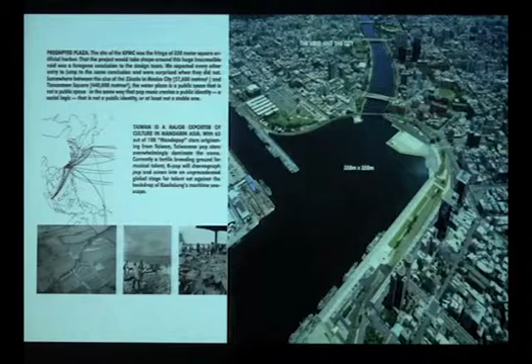Obviously, the first question that might come to mind is, if we are thinking of this big square that is the largest open space right adjacent to the center of Kaohsiung, as a public space, what kind of public does it bring into existence? Another way to ask that same question is: is pop music the occasion for a public gesture?

Which I think is actually a pretty interesting question. We might wish for something that is more stable than pop music, than a commercial phenomenon, something that's formulaic, but also something that is huge. This is called Mandarin pop, larger than pop music is in the West by a good degree, and a lot of the rising stars are Taiwanese for some particular reason, leading it to be a point of pride.

It seemed that somehow if we couldn't leverage a full-scale social space, public space, on the back of pop music, perhaps the instability or the frivolity of pop music—maybe we could do it if it were qualified by the fact that the space is actually a void, that the space in fact is unstable as the occasion that brings it into existence. And we could work with that. We could go forward with that.

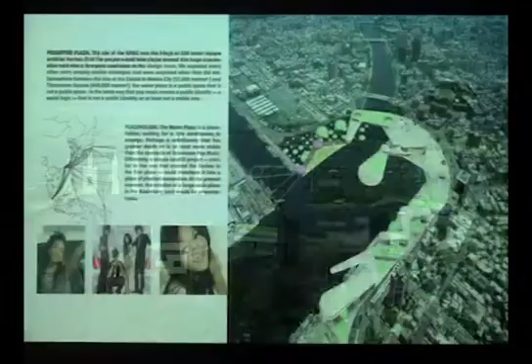This was our first study model cut into the site, showing that we essentially occupied the fringes. Also thought of it as iconography.

There's a huge rivalry between Kaohsiung and Taipei. And this is actually from the competition brief that compared the size of Taipei 101, which is a very large building—the second one, actually this one up here in the scale—to the size of the site, adjacent to a very large building in its own right, from which this picture was taken, which marks the landscape now, the jumbo-sized landscape of New Kaohsiung.

And this was very much thought to be a part of this big world. Therefore, we took on the entire site, as opposed to taking on just one or just two sides of it.

The way we took it on really comes from the fact that 20,000 people at one time might come and go in a single afternoon. Something that a single building has somewhat difficulty doing, but a city can do quite easily. Cities can manage large numbers of people in short periods of time, such that it was obvious from the beginning that we would take an aggregate, make an aggregate solution.

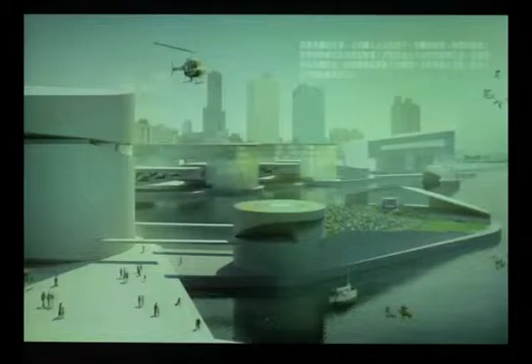And I think it's fairly self-explanatory, the way that we manipulated the basic circular unit and then connected it and interlinked it with a fairly complex program, the program you can see on the right being spelled out.

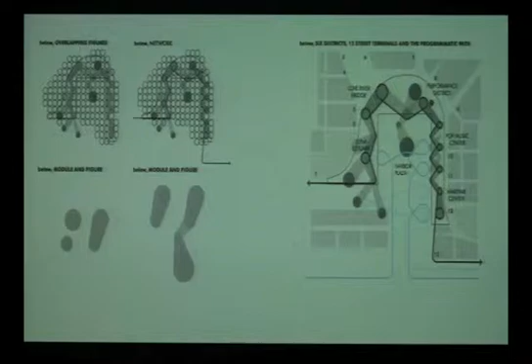It's a very simple strategy of setting out a field, providing the means for figuration, and then coming up with an access, a way to penetrate that field to open up these main programs to the city surrounding it.

We wanted a geometry that was very, very rigorous and self-referencing, but at the same time was utterly connected to the world outside of it.

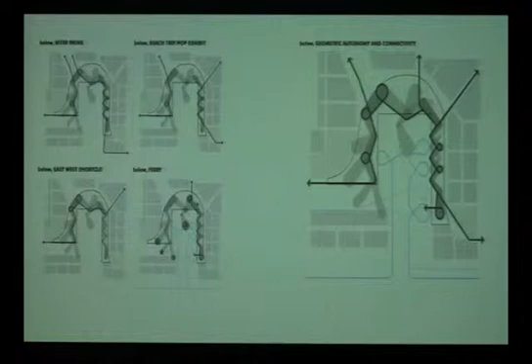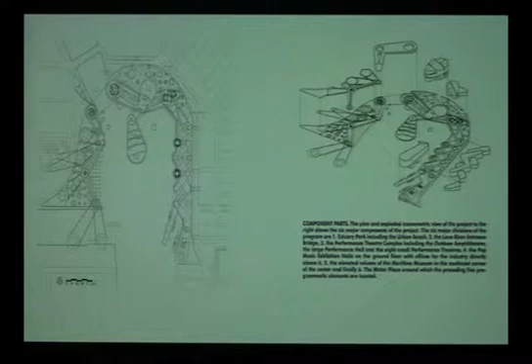This just goes through the pieces of the program, which, despite the fact that the underpinning geometry is pretty demanding and restrictive, ultimately gave us a lot of room to develop different characters around the site, but still hold it together, primarily by the large figure in the center.

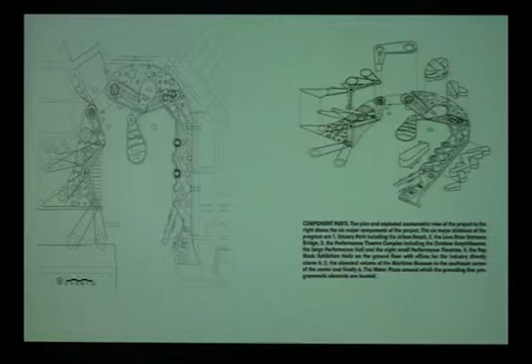One side of it, we reconstructed the estuary, did a lot of environmental research which I'm not showing, but it was backed up by a public space, a beach, for lack of a better word, that faced the open amphitheater. The program toward the back of the screen is the pop music exhibition space at the Maritime Museum.

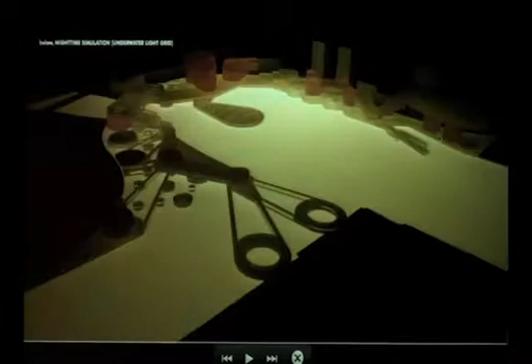These are the two theaters, which I think I have some images of. We did take on this void. This is a really crude way to explain in the competition that we had put a field of lights. There's a tradition in Kaohsiung of lighting the Riverwalk, which we extended to this big open space.

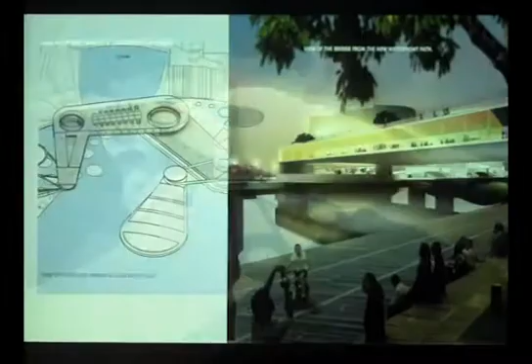There's the performance theater, about 3,500 people, and then the 12,000 seat amphitheater with a single choke point, which, believe it or not, was a requirement in the program.

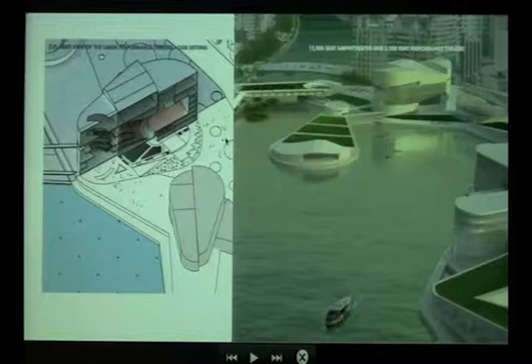This is the Love River that comes out of the city. This is obviously the estuary condition that was reconverted. The bridge over the Love River, which I just showed.

This is around the back of the large performance theaters, one of these dead-end conditions that picks up a plaza and creates the entrance for two performance theaters with the wet plaza in the background. Estuary.

There's the diva again as the culmination, but also the question about the social. And as an example,

What we were doing in this project, thinking about how to make the bridge between architecture and urbanism, is to be particularly sensitive to the effects of infrastructure.

The power of infrastructure, not just in this building but in this project, and in any project, is that it reaches deeply into buildings, that buildings are completely conditioned by infrastructure in a way that we really don't acknowledge when we're preoccupied with buildings, I think.

We've all thought of the example of taking a spec office building and putting it in a central business district in a downtown area, then taking that same architecture, that same building, and putting it in an office park on the edge of town. We know instinctively, because we're sensitive to environments, that those are completely different environments because of the different urban conditions they sit in. The difference for us, for me, is in the infrastructure.

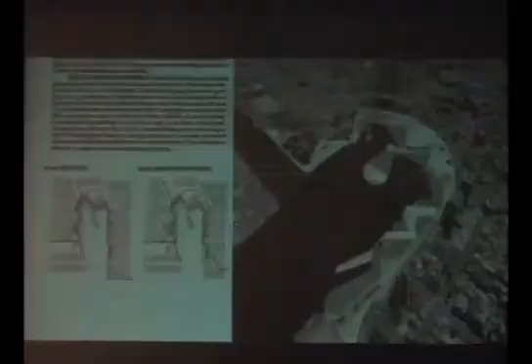It determines if you walk fast or walk slow, left or right, up or down. It determines actually if you walk at all. Up until the moment it breaks down, infrastructure operates in the background, leaving us largely unaware of the complex network of subjects and objects that surround and define us. The fact that infrastructure is unseen makes it more important, not less.

It's a kind of sensitivity I've always carried with me, and it seemed to me for a long time to be the key, however it can be addressed, between the architectural and the urban. It is the atmosphere that this building sitting on a campus contains, because it sits on a campus as opposed to a city street. That's architecture. That's something we can work with.

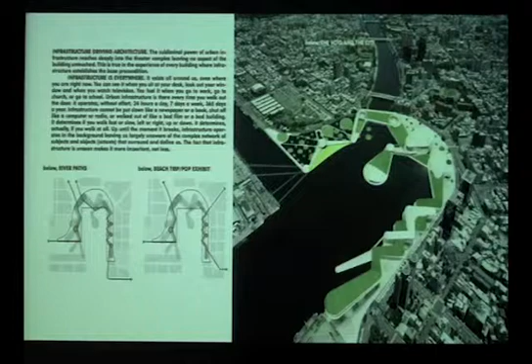That raises a second question. This voided out diagram is not a very good introduction to it, but it's the best I could actually do. It's not the way the void is usually represented. The void, as I said before, is the water.

But it raises the question of what infrastructure. Number one, what would this building be if the infrastructure weren't around it? It would not be a very interesting building. But more important is the fact that the infrastructure that surrounds this building is outmoded.

It's going to take me a few passes at this to get it across. This infrastructure is gridiron infrastructure, like the infrastructure of LA County. It is a continuous open gridiron grid structure which in its formation is ancient. What we also know, because we can look at Google Maps like everyone else, is that the way Kaohsiung, like the United States, has been built over the last 50 years has nothing to do with this gridded infrastructure.

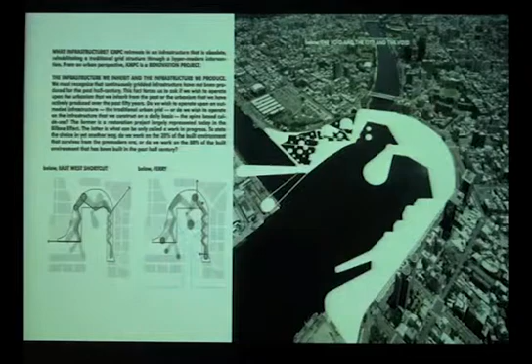Not at all. In some ways it was disturbing to us, to the extent that it led us to ask the question: are we really dealing with urbanism if the infrastructure we are intervening in is outmoded? Is it not, in fact, a rehabilitation project, this project, insomuch as the urbanism that it responds to, the urbanism that it reflects and mirrors and exploits—that's the word—is in fact not the urbanism we build today, not the urbanism that's been built over the last 50 years.

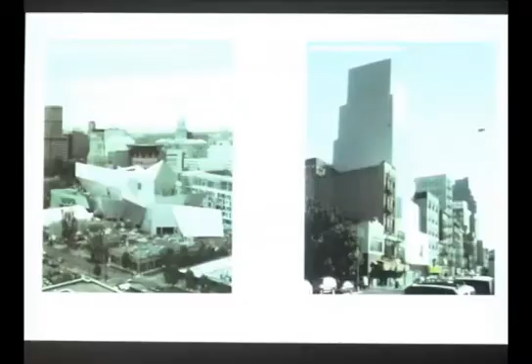This has been the question I've pursued for quite some time, and I want to briefly remark on that phenomenon: that some of the buildings I admire the most, and that we all admire the most, are what could be called rehabilitation projects. They work off the relationship of an urban fabric—like the project I just showed—with an urban fabric that is at least 50 years obsolete.

There is nothing wrong in my mind at all. I'm not trying to denigrate the activity that architects do and must do, which is to rehabilitate old urban infrastructures. It's an important job that architects do, and it's been with us for a while. The Pompidou Center in 1977, I think, really initiated it.

It was the turning point of modern urbanism, where the forms of the megastructure—drawn from Archigram and any number of projects—forms that were about new cities, about alternative forms of habitation, about a different kind of environment than the traditional environment modernism had imposed upon us, were then filtered back into the city in a fairly traditional way to define a monumental order. Like I said, the birth of the 20th century monument occurred in 1977.

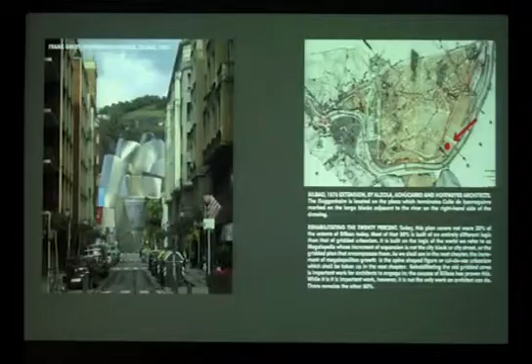This other 80% was, in a weird kind of reverse logic or historical retrospective, the subject of a project by Candilis, Josic and Woods, a very important firm in the 50s, members of Team 10, who also did a competition project in Bilbao called the Asua Valley Competition, where they first developed what they called the STEM project. I don't know if you know much about Team 10.

In some ways, it's not necessary to know so much about the project. I'll show you in a second how the STEM project relates to contemporary infrastructure. But the fact is that was the city they were working on—the Bilbao that was being built in the 60s, as opposed to the Bilbao that had been built in the 19th century.

And my point is pretty simple: isn't this another job for architects to do, besides the rehabilitation? Isn't this, in addition to rehabilitating our traditional urban cores?

I've read various statistics that say 80% of the built substance today, the environments that we live in, has been built in the last 50 years. You look at maps, you can sort of get anecdotal evidence. It's hard to nail it down. But the amount of the built environment that is in fact traditional, that is in fact gridded—that old infrastructure—is

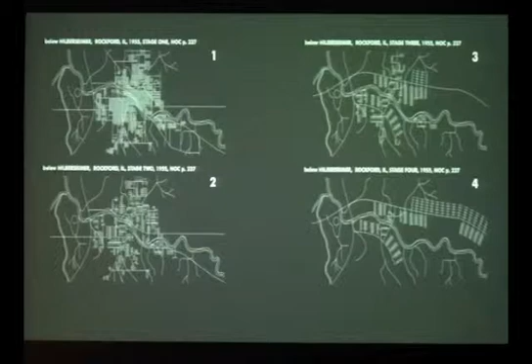He saw the city, if you can believe this—you read his text—as a kind of organism that needed to be acclimated to its natural surroundings. It had the qualities and characteristics of an organism, which is a pretty interesting way for this old minimalist to be thinking about urban environments.

In his projection, this third one is not unlike what we find in the 1950s in Houston—a kind of intermediate state. You can almost say Hilberseimer went too far. The purpose of this is to suggest there's a big range between the grid and the spine that is actually more like the environments we built.

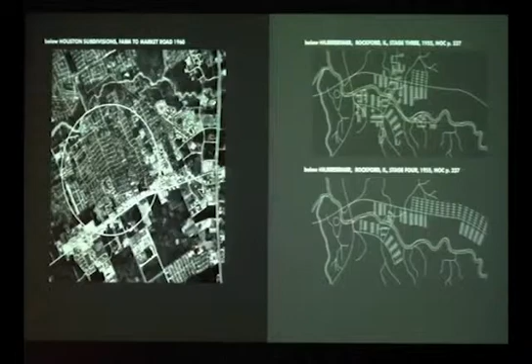This is FM 1960 in Houston, a farm-to-market road. That's a freeway, Interstate 45, going north—a strip axis of the subdevelopment spine. This is a natural feature that cuts through, which is, of course, one of the reasons Hilberseimer wanted to break up the city and infuse it with space, to be more responsive to the natural environment.

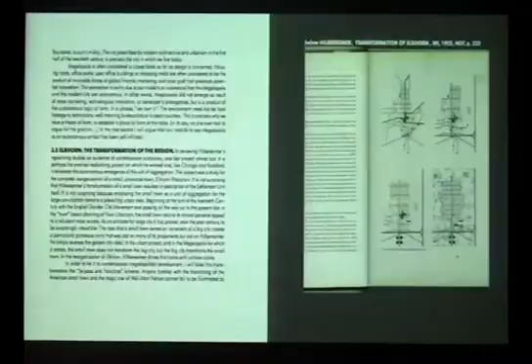He also did a very small city project in a little regional town called Elkhorn, Wisconsin, transforming it into a single unit, a single spine, remapping the town around the new freeway. If you look at a plan of Elkhorn now, you can see him taking the main street apart and reconstituting it out of the freeway.

This is the same way small cities in America have been franchised and bypassed for the last 50 years. What's interesting is that we usually think of megalopolis as something that happens in big places, but megalopolis is everywhere—it happens in small places too. We traditionally base subdivisions on the small town; that's the basis of new urbanism, that the American town is the unit of aggregation in a modern megalopolis.

This turns that on its head. It's not that the small town remakes the big city—it's the big city that's remaking the small town. And you have to sort of acknowledge what has in some ways occurred.

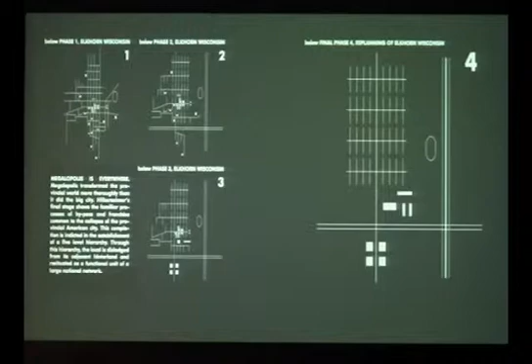You see so many politicians going to small towns and saying, 'this is the heart of America.' But Sarah Palin's America is not the same as, say, the Coen Brothers' America. The Coen Brothers' America has a lot to do with what is actually out there, and the transformation not only of the small town but of the region itself—it's regionalism playing out in a big way.

To return to my topic, so as not to take too long—if I could just do this one diagram. This is a traditional urbanism of Marquette Park, Central Park, where the streets themselves extend to the horizon. That's the fantastic thing about the 19th century grid-iron plan: every street went to the horizon. The form was open, the space was closed—it was framed, like Central Park, like Marquette Park, like Pershing Square. These are framed spaces.

You have open form and closed space. On the bottom, Hilberseimer's transition shows the opposite—closed form, cul-de-sacs, terminal conditions, where everything has a stopping point, and open space. It seems to me, if I map these on two axes, where we want to be is somewhere in between, with open form and open space.

This is, I think, the counterform that Van Eyck was looking for, which is why I brought the quote back here. If we're going to connect the form to the social, I think it has to be done not in terms of open form and closed space, which is the metropolis, or open space and closed form, which is megalopolis—what we have, for example, in Orange County. In the opposite quadrants, closed form and closed space is obviously a prison, and open form and open space is where I think we want to be. It's the city, or at least a tentative definition of the city.

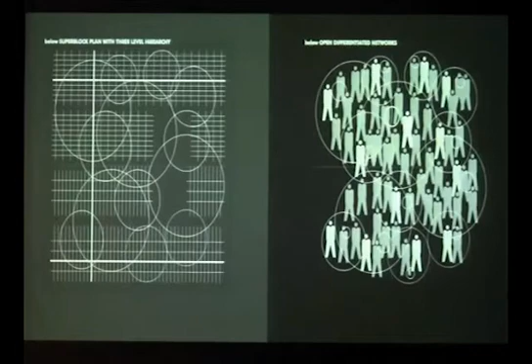This, by the way, is probably Broadacre City. This is more closely related to Hilberseimer's image, and certainly more closely related to what we built today. When you take all the cross-axes out of the grid, it's like a whole room full of tables in a restaurant, and everyone at the tables gets up and starts to eat at a lunch counter, and the relationship is now side to side as opposed to across the table.

There's something about pulling out the cross-axes of the grid, the substrate, that starts to individualize each specific destination, which I think in some ways is starting to identify this kind of infrastructure, this spine form, with a kind of individuation.

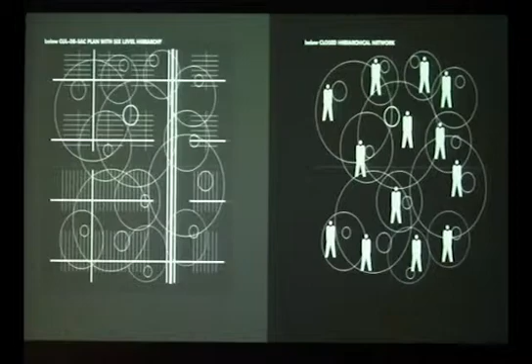We know this. This is a sort of Design 101 diagram, and you've all confronted this in one way or another, where you have 13 connected points on the left-hand side, 13 connected points on the right-hand side. They're the same size, the same points in space. And we know, despite the fact that LA is unbelievably congested, we still have options.

We can move around. If this is my house, this is my office, this is the grocery store, that's the doctor's office, this is the school, mathematicians will tell you that very quickly we get close to an infinite number of potential linkages between these 13 points, right?

On the right-hand side, those linkages are all surprisingly dropped down to one. Only one way to get from this point to this point, where you're constantly feeding back up the hierarchy from the lower level to the upper level, back out to a trunk road, maybe to the feeder road, and then back down into the trunk road and out to another spine.

The diagram is always, as you know, striking because of its elimination of choice, and something that strikes us as incredibly outrageous in the way we normally think about suburban environments. Freeways, automobiles, freedom that's implied in those kinds of tropes aren't really played out in the substrate that structured them.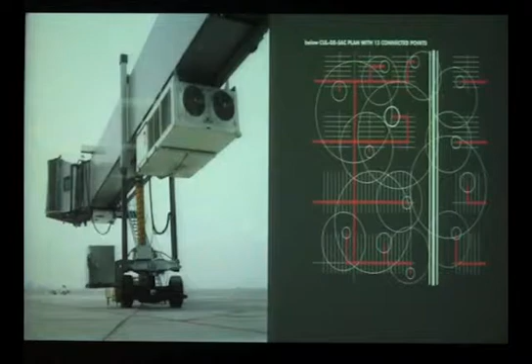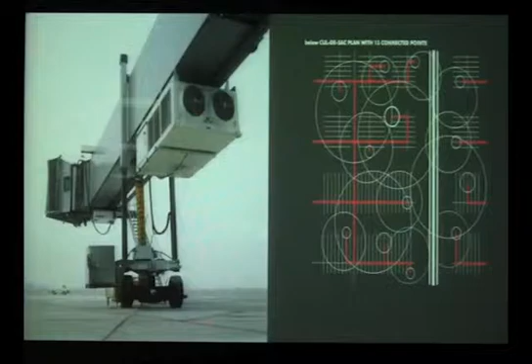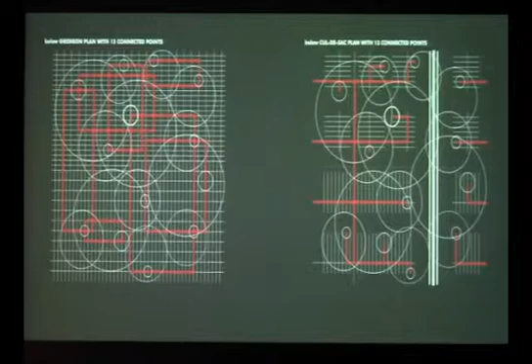And terminal points. I threw this diagram in here at this particular point, certainly not to damn the megalopolis or say that it's reactionary or fascistic, or that it's taking away our precious options. It is simply to notice that a city made of terminal points and terminal conditions is very different than a city made of circuits. And it's something we need to take hold of and understand, the difference between the two, the circuits and terminal conditions.

And it's a larger effect. It's not just suburbs. It's not just cul-de-sacs. It's the way we structure our environment. At the end of the road, any road we're on now, is not the horizon. At the end of the road is a parking garage, in some ways.

One little piece of reading about this spiral figure that is drawn here. This diagram maps the logic of the terminal node in cul-de-sac urbanism in the megalopolis. The path to the specific place in the cul-de-sac will always terminate in an exclusive destination or endpoint. The path on the open grid, on the other hand, will never terminate, because the grid is infinite in all directions. As opposed to the cul-de-sac's termination of movement, the grid offers only a series of arbitrary stopping points that are often described as coordinates in space.

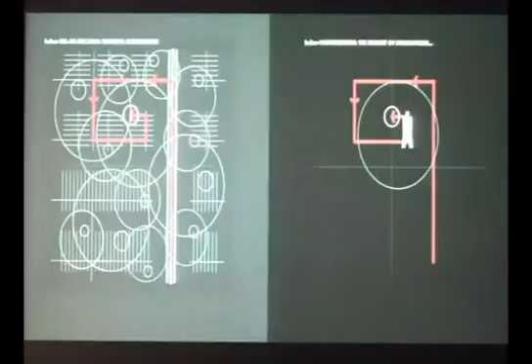Each of our delicate egos seated at the base of a headlong downward implosion, a terminal destination. The spiraling inward constitutes the existential reality of the cul-de-sac environment. This is a lock—for me, it's a lock between the formal and the social that can't be denied.

It is a habitual pattern of movement, much larger and of much greater significance than traffic engineers would have you believe. I think it defines, in some ways, how we recognize ourselves in this, in our age of entitlement, our Facebook age, where we hold out our individuality in the face of massive structures around us as the ultimate aim and goal—and where this actually goes.

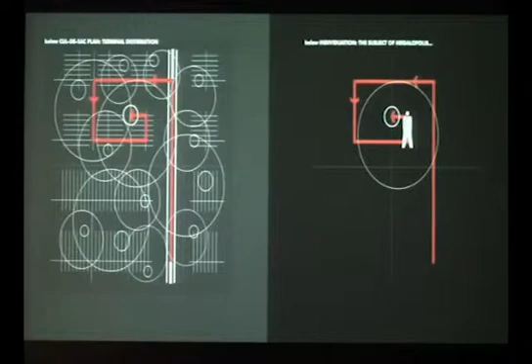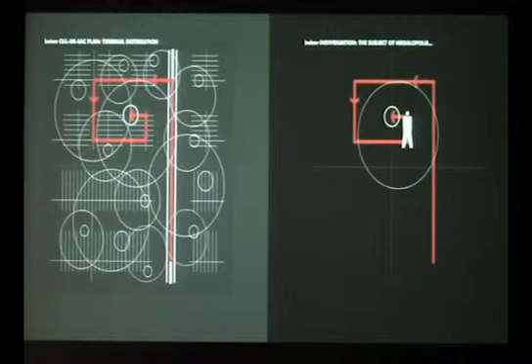It's not to take a position on it, because I think we have to be professionals. We need to understand it, not embrace it but not reject it, and understand how it reflects the deeper social dimension. What's important for me is that this is a starting point—this bond between the social and the formal—and I think it describes the urbanism that defines us, if I could say it that way.

Perhaps an antidote for this is a brief quote from Michel Foucault, from 1968, if you can believe it: 'Do not demand of politics that it restore the rights, in quotation marks, of the individual as philosophy has defined them. The individual is the product of power. What is needed is to de-individualize by means of multiplication, displacement, diverse combinations.'

'The group must not be the organic bond uniting hierarchized individuals, but a constant generator of de-individuation.' I like it because it's turning around and going the other direction. It's a kind of warning, a tonic for our obsession with individuality.

In some ways, the perils of individuation couldn't be more obvious. It's almost as if the social has been literally deconstructed into its constituent element, the individual, only to be reassembled electronically. I was warned by my daughter not to show this image for fear of being a curmudgeon.

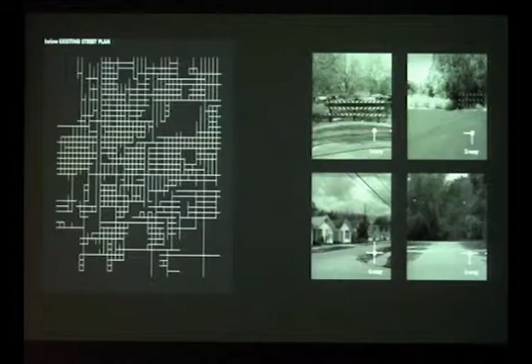This one just happened by itself, by the fact that infrastructural projects, street demolitions by industries, big train yard, freeway construction, all conspired to fracture this grid, giving it, in spite of its horrible social condition, a quite beautiful quality which we thought we could work with.

The traditional response to this would be: fix it, put it back, make the infrastructure whole again, reestablish the streets and build the houses side by side on them again.

But I really felt, and still feel, despite a good amount of criticism on this project, that it's not enough to return the Fifth Ward to how it was laid out—actually I don't remember when it was laid out now. Let's just say the turn of the 19th century. It's actually older than that, but its full gridding didn't happen until the turn of the 19th century. It was originally a slave town, founded by freed slaves.

Anyway, we resisted the idea that the best solution was nostalgic, to go back to what it was, to make it whole again. The question being, couldn't we offer a modern infrastructure as opposed to a 19th century infrastructure? And wasn't it already on the make in the way that it had been formed?

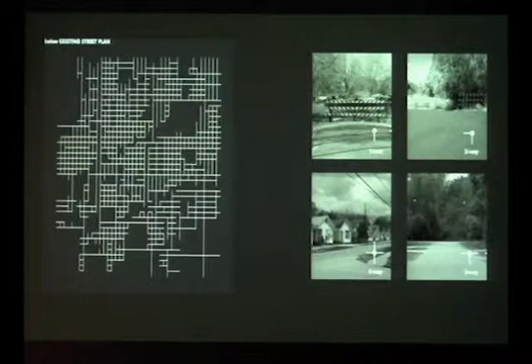The way we got a handle on that is by a really simple accounting system of intersections: one-way, two-way, three-way, and four-way intersections. One-ways are dead ends. They're distributed up there. I'm not going to show you many pictures of the Fifth Ward, so I want to talk about it in a more general sense of how it is you try to hit these marks between the traditional continuities of the grid and the more contemporary discontinuities of the cul-de-sac.

So these are the point fields that come out of those studies: the existing street intersections, all intersections, demolished intersections, which we were, if you can believe it, pretty excited by, because we really don't ever account for the things that aren't built in the first place. We found a way to account for them.

Three-way intersections, which are T intersections—you probably don't know it as much here as in other cities built in smaller increments where you have T intersections that function literally like walls. And four-way intersections, which not surprisingly mark the residential concentrations.

What we did is did a tally and found that each different program area, which are listed here, have a typical number of intersections and a certain type of intersection. It sounds fancy, but it's really straightforward: big industrial areas don't need a lot of roads, and they all have dead ends in them, and they have staging yards and storage yards, et cetera. So it has a very low continuity.

Essentially, you can score an intersection from 1 to 4. A 4.0 continuity is completely open. A 1.0 continuity couldn't exist, because it's a one-way, a field of one-way points. But you get the idea that each different program had a different continuity, and we could add those up over a given area and then integrate them so the three-ways and the four-ways and the one-ways all made sense together and generate a street pattern out of them, which is what we did.

We did a zoning study, which I'm not going to bother you with, that was quite complex, of how we simultaneously did mixed-use zoning and single-use zoning, overlaid the two into these separate districts, but then laying out a distributed pattern of uses, came up with this grid pattern, which came from the continuities that each use required. The other thing that we did was we grouped together the uses that had very little building associated with them, or none.

There was a lot of empty space, a good amount of park space that we included in this total. You can see in this diagram, if it's clear on the screen, this is the series of open spaces marked by the one-way intersections and dead-end streets, which, as opposed to the way we traditionally frame urban space with an edge or form, we're thinking of these dead ends as the place where form stops is where space starts.

At any rate, this spatial core of the plan was intending to use open space as a binding agent, something that held it together. This is the image of it, the one-way intersections here.

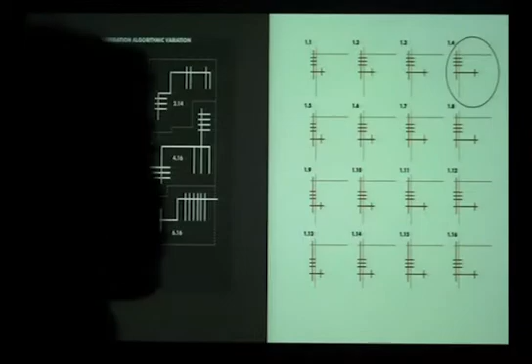And these are the residential areas in the four-way switches. We did a second overlay on that, which would take me too long to get into, but it explored the world of aggregation at a larger scale, and explored everything that exists as a design possibility between the spine and the grid.

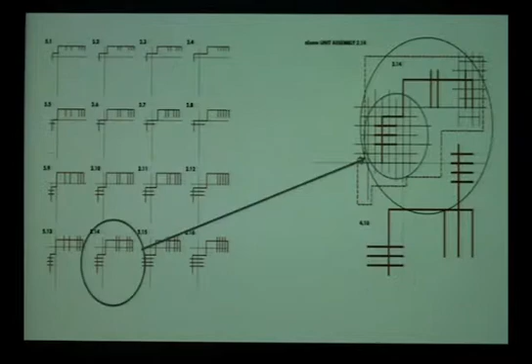And we came up with these algorithmic tables where we did one, right? This is copy move, copy move, copy move in the horizontal direction, copy move in the vertical direction. They're fairly straightforward, and we assembled them into an aggregation.

What we're actually moving towards is trying to take on the real problem of the megalopolis, which is that it doesn't accumulate. In simplistic terms, there is no whole that is greater than the sum of the parts, and it's absolutely defensible to say that the very definition of a city at its basic level is a whole that exceeds the sum of the parts.

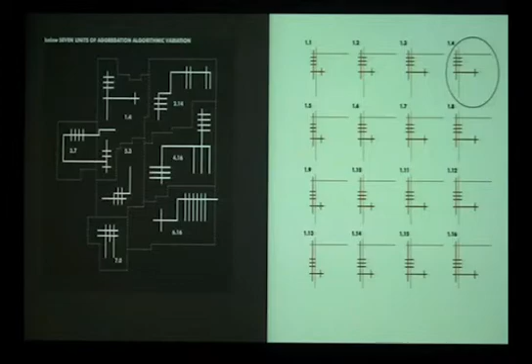In megalopolis, we just produce parts and parts and more parts, and another deal gets made at a bank with a developer, with a landowner, and 100 more parts get added to it. The question we wanted to ask with this is: are there possibilities for aggregation at this large scale? Is it possible to aggregate a whole, to accumulate a whole out of a series of parts?

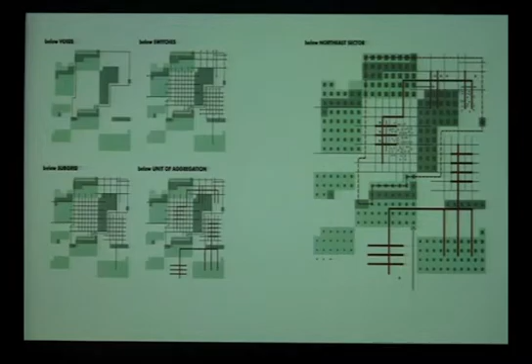And we did it by trying to actually exploit these hierarchies. There was a complex—like I said, it's an incomplete project. I would have to say that despite the fact we went through a number of part-to-part variations, we never came to resolution.

Some of the more interesting studies had to do with transitioning from the original housing stock to the new housing stock, which developed by fiat, interesting part-to-part relationships. But part of the study was also to study density, so we looked at increasing or varying the building stock in terms of a collection of different scaled objects,

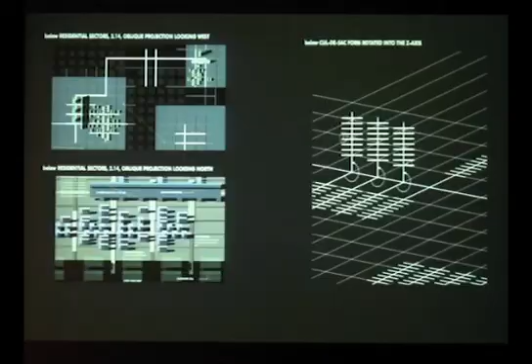pavilions, bars, and towers, and the possibilities that if you array these things in a certain way, the parts could start to resonate with each other, and make the very elements of the megalopolis—the structure, the infrastructure—start to aggregate into a greater whole. And that's it.